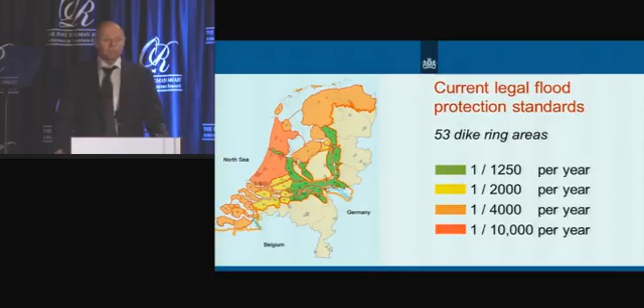Many of the existing standards were partly based on Van Dantzig's pioneering Econometrica article on determination of optimal dike heights, which is considered as the start of operations research in the Netherlands. And we see our contribution as a continuation of that proud history. But some parts of the standards were never substantiated by scientific analysis. Nevertheless, even today, the existing flood protection standards in the Netherlands are the highest in the world, compared, for example, to here, the standard in the USA of 1 to 100 years.

In 1993 and 1995, high flows of the Rhine and the Meuse rivers led to very risky situations. In 1995, the Netherlands had to evacuate more than 250,000 people because of fear the levees would break. Now, this event was a wake-up call to the nation. Moreover, since 1953, the population of the Netherlands had almost doubled and its GDP had increased fivefold. And all these developments and the awareness of the increased sea level rise and climate change strengthened the consensus that the standard had become outdated.

Therefore, in 2006, the Vice Minister of Water Management, Melanie Schultz, who is currently the Minister, asked Deltares to perform a cost-benefit analysis to flood protection. And this was the birth of our project. At the top of our project organization is the Delta program, led by the Delta Commissioner. And at Deltares, we decided to put together the best team possible with experts from research institutes, from government, universities and consultancy firms. These are the CPB, the Netherlands Bureau for Economic Policy Analysis, the consultant HKV, Tilburg University and Delft University of Technology.

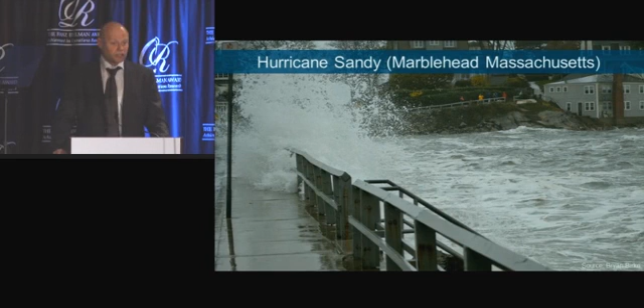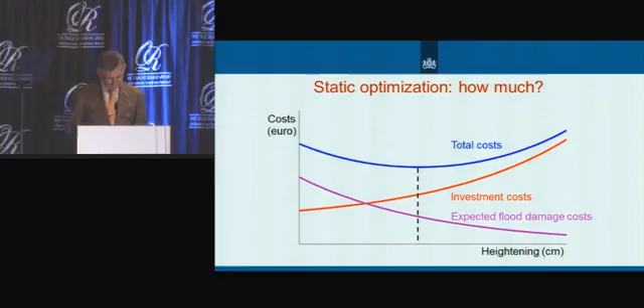The aim of our project is to propose new values for the national flood protection standards based on an optimizing cost-benefit analysis. The image projected here shows the optimization problem in its most simple static form. Clearly, higher dikes mean higher construction and maintenance costs. However, the higher the dikes, the lower the expected flood damage costs.

Absolute protection against flooding is impossible. Regardless how high the dikes may be, there will always remain the potential for flooding. Our approach is to minimize the long-run sum of the investment cost and the expected flood damage costs. Thus formulated, we have an economic question with a rational solution.

However, in the end, a political decision has to be taken because in our calculations many value judgments are made, for instance on the value of human life and the extent of risk aversion. Moreover, there is the equity issue.

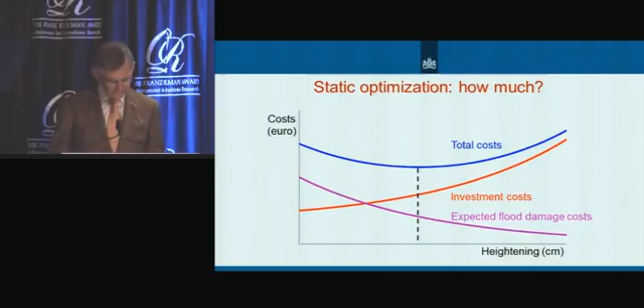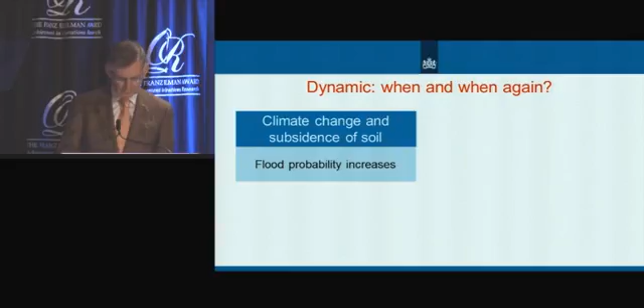However, not only the how much, but also the when to invest question is important because of dynamic effects. The probability of flooding is rising due to climate change and soil subsidence, and both population and wealth are increasing, hence the damage by flooding increases. In combination, expected damage is increasing, that is, the probability times the magnitude of the damage by flooding.

We spent several years and millions of euros to collect huge sets of data to construct and estimate the following important model elements for each of the segments of the dike rings: a cost function for subsequent dike upgrades, a formula for the flood probabilities as a function of dike height, now and in the future, and a formula for the damage costs, now and in the future.

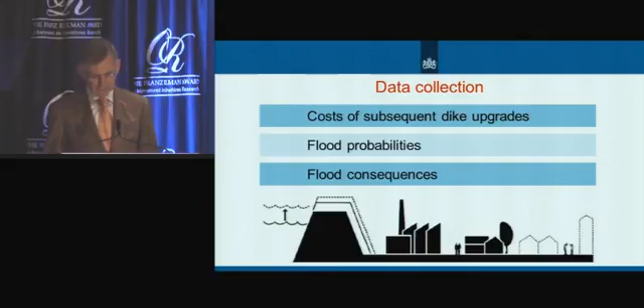In the paper submitted to the judges, we illustrated the detail in which the information has been gathered using the example of investment costs. We showed the extent of knowledge used by the example of the flood probability along the coast. Of course, we are aware of the difficulty of determining the small flood probabilities used in the Netherlands.

Flood probabilities are the combination of many factors relating to the loads on the dike and to the strengths of the dike. The best approximation of the flood probability based on the results of all detailed studies is the specification shown on the image. The flood probability depends exponentially on the relative height of the dike.

The estimates of the parameters are the combined results of sophisticated statistical analysis, physical models for the strengths of a dike, historical data about past events going as far back as the year 800, and nowadays many thousand simulations of many types of very bad weather conditions. For more detailed explanations, I refer you to the extensive technical literature on these subjects, which we had to master for our project and which is detailed in our paper.

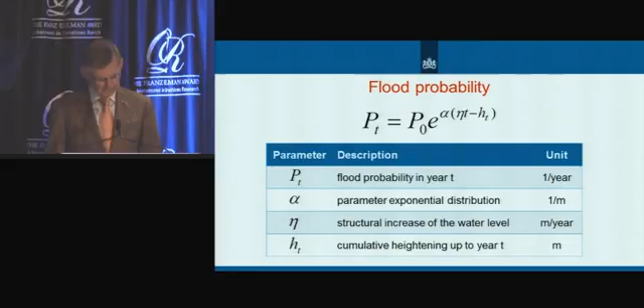Now I'd like to explain a bit more about how we estimated damage costs. To get a good idea of the extent and impact of a flooding incident, the 35 water boards and provinces constructed more than 700 flood simulations using regional hydraulic models. In a moment, we will show one of the larger of these flood simulations.

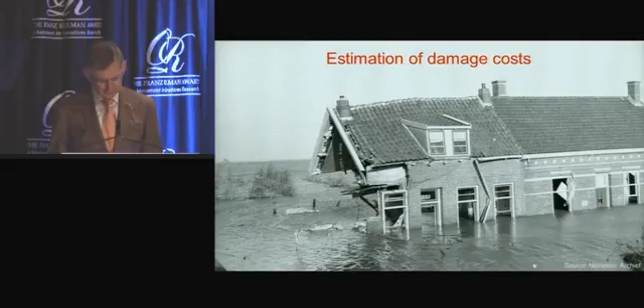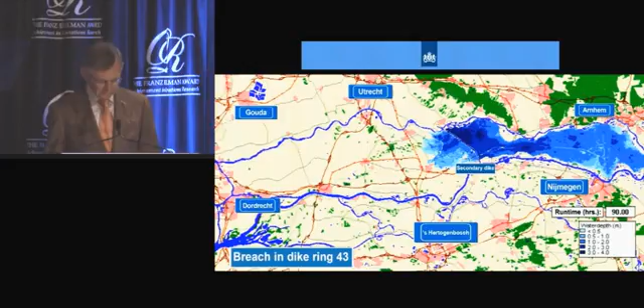The animation starts at the moment a breach occurs in dike ring 43, a dike ring with a population of 300,000 people. In this animation, the breach is located at the east side, which is far away from the sea, so the whole dike ring 43 is flooded. The flood stops only temporarily when it hits a secondary dike. It seems to halt when reaching the primary dike that separates dike ring 43 from dike ring 16.

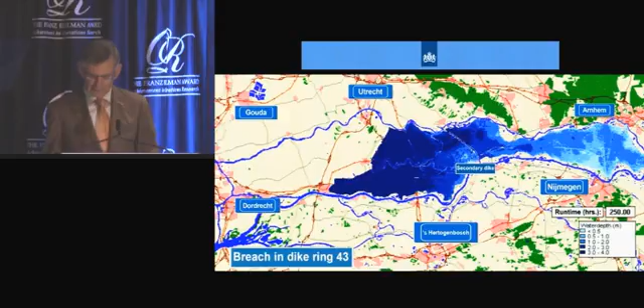However, in this simulation, the flood is so big that it overtops even this primary dike, so that dike ring 16 is flooded as well. As you can see, the water will reach a depth of around 4 meters in the western part of dike ring 43, which means that the material loss in that area is high and almost complete. The total damage in these two dike rings will be 75 billion euro.

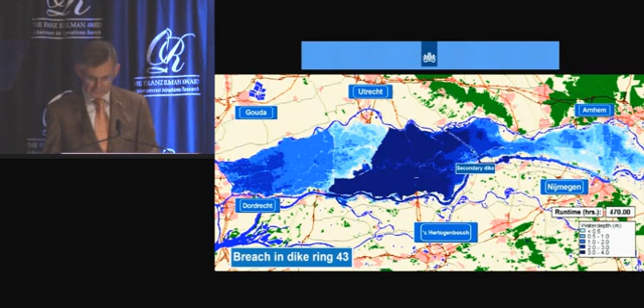For each of these 700 flood simulations, we combined local information about speed of the water, inundation time, and water depth, together with detailed geographical information systems featuring data on number of persons and households, on real estate objects, infrastructure, and so on. Multiplying the damage costs in each flood simulation with the probability of that flood occurring, and then summing over all flood simulations gives an average value for the expected damage in each of the 53 dike ring areas.

My colleague, Dick den Hertog, professor in operations research at Tilburg University, explains how we approach the optimization question mathematically.

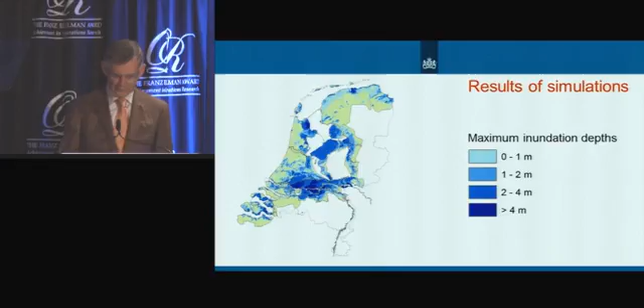The optimization problem is to minimize the total long-run costs, consisting of expected damage costs and investment costs for upgrading dikes. Most of the dike rings contain multiple dike segments.

This is a picture of the Bommelerwaard. The dike ring consists of 3 segments, since it is surrounded by 3 different rivers with different characteristics and thus different parameter values. Segment 1 is the northern dike along the river Waal. Segment 2 is the southern dike along the river Meuse. And segment 3 is the western dike along the river that connects those 2 rivers.

I live here with my family. In 1995, we were also evacuated. Fortunately, nobody was hurt, even though the water reached all the way to the very crest of the dike.

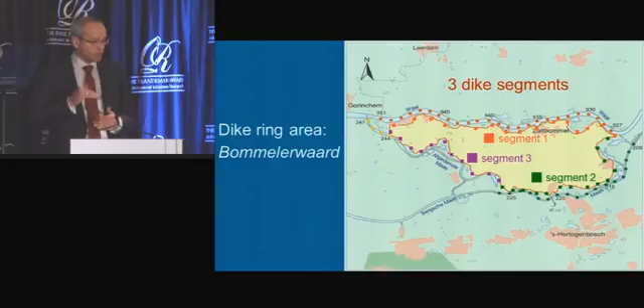Dynamic programming can be used for dike ring areas up to 3 segments. But in the case of more segments, the state space is too big. We also tried an impulse control approach, but it appeared that this method cannot efficiently solve problems with multiple segments. We therefore developed a mixed integer nonlinear programming model. We don't have time to discuss this model in detail. We only illustrate the structure.

We discretized the time, and the binary variables are the decisions whether a dike is upgraded at a certain time or not. Note that we need a binary variable because of the fixed investment costs for upgrading a dike. The continuous variables are the amounts of heightening of each segment of the dike.

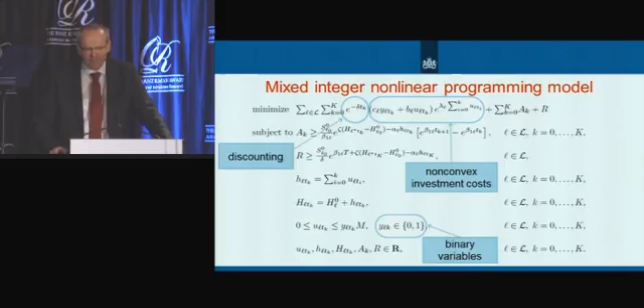Both the expected damage and investment costs are nonlinear functions. The investment cost is a function of the cumulative dike heights, since heightening a dike also means broadening the dike. So upgrading a high dike is more expensive than upgrading a low dike. This investment cost function leads to a non-convex objective function. However, we have much evidence, both from theoretical and numerical convexity analysis, that the resulting optimization problem is convex in a wide neighborhood of the optimal solution. Note that we also discount the investment and damage costs.

The biggest problem has 10 segments at a time horizon of 300 years, with a discretization period of 5 years. A time horizon of 300 years is necessary to get a stable solution for the period until 2050, which is the relevant period for policy. The corresponding optimization problem has 610 binary variables, almost 1900 continuous variables, and in total more than 3,000 constraints.

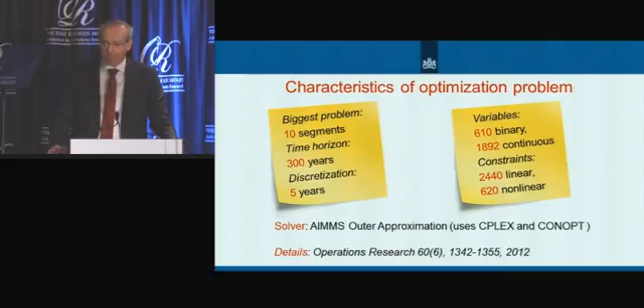We used the outer approximation method that is implemented in AIMMS, which uses CPLEX and CONOPT as solvers for the linear and nonlinear problems. Due to recent developments in mixed integer nonlinear programming, we could solve problems up to 6 segments. Using additional heuristics developed by our team, we were able to also solve the largest problem with 10 segments within 1 hour. Solving all 53 dike ring areas took about 1 day. For more details on the model and solution methods, we refer to our paper in Operations Research. The model and solver were implemented in a user-friendly software package.

Let's have a look at the optimal solution for a dike with 3 segments. In this figure, we have the years on the horizontal axis and the flood probability on the vertical axis. The flood probabilities of all 3 segments are the 3 sawtooth curves in green, yellow, and red. The first upgrade is in 2034. Note that all segments are upgraded at the same time. This is plausible since upgrading a segment when another segment is still the weakest does not improve the safety very much. Of course, the amounts of heightening for the three segments may differ.

Immediately after an upgrade, the probability decreases sharply. Thereafter, it increases again due to rise in the water level. And then, in 2075, all three dike segments are upgraded again, and so on. Finally, we defined the economically efficient standard as a central value for the probabilities associated with the optimal investment strategy. This is the blue curve in the picture.

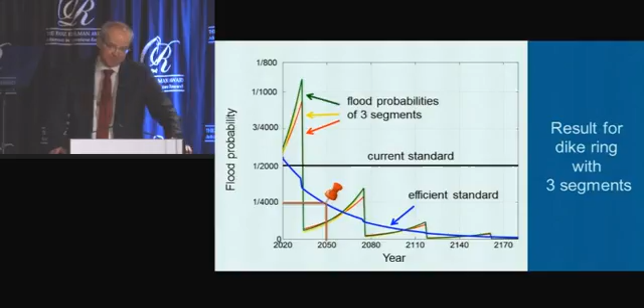The most important results of our project are the efficient flood protection standards. Here you see the efficient standards according to our model on the left map and the existing standards on the right map. The existing standards are highest in the central western part, the red color, and lowest along the rivers, the green. The other areas, yellow and orange, are in between. If we compare the two maps, we observe the following.

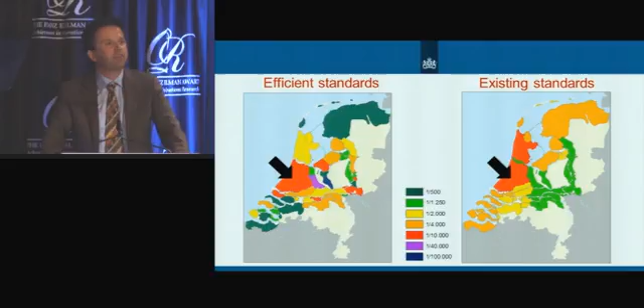1. Flood protection in the northern part is more than sufficient. Existing standards exceed efficient standards. 2. Flood protection for the most valuable part of the country, the central and western part, is still appropriate. The existing standard equals the efficient standard. 3. The existing standards along the rivers are much lower than the efficient standards. Flood protection should be increased.

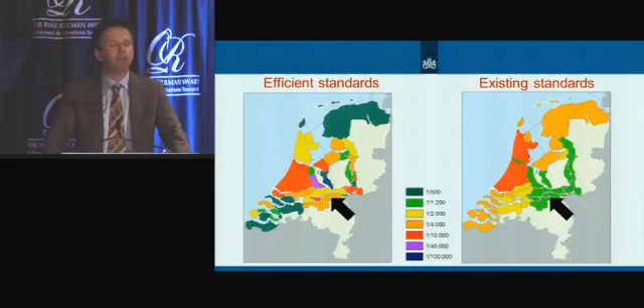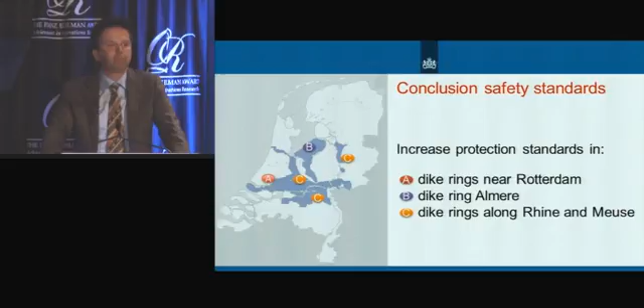So if we compare the standards in more detail, we conclude that flood protection should be improved in the areas near Rotterdam, for the fast-growing city of Almere, and for most areas along the Rhine and Meuse rivers. For the other parts of the Netherlands, the existing flood protection is more than sufficient. So how can we best explain those remarkable differences between the existing and efficient standards?

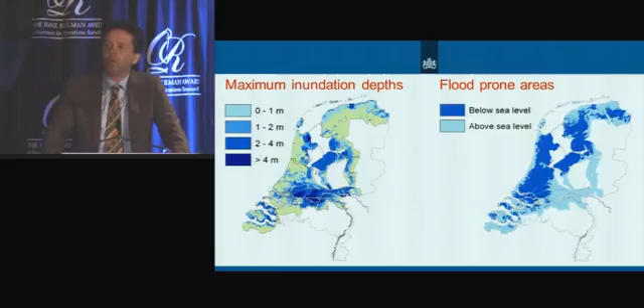Let us look at the total investment cost and damage cost of the different proposals for new standards over the period until 2050. This is the period for which the new standards will apply. For no change policy, no additional investments are required. The expected flood damages will amount to 15 billion euro, and these are also the total cost.

For the advice of the second Delta Committee, an investment of 11.5 billion euro is required. Compared to the no change alternative, the damage cost will decrease with 90% to 1.5 billion euro. Hence, the total costs are 13 billion euro. If our advice would be followed, the investment costs are 3.7 billion euro, and the expected damage cost would be 5 billion euro. The total costs are 8.7 billion euro.

So clearly our advice leads to the lowest total cost and hence is the most efficient. We get 2/3 of the benefits of the advice of the second Delta Committee for 1/3 of the costs. Note that the damage cost also includes the cost of human life and other aspects which are difficult to value in monetary terms. We therefore extensively performed sensitivity analysis. Those show that our conclusions are robust.

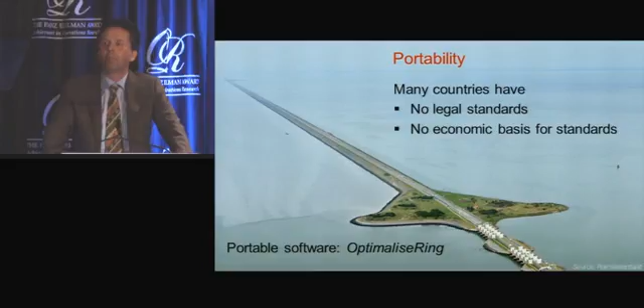It can prevent unnecessary human loss and save billions of euros in flood damage. The omission of cost-benefit analysis in flood risk management may turn out to be penny-wise but pound-foolish. The optimization model and solvers are implemented in a user-friendly software package to enhance portability. Authorities in France, China, Pakistan, and the US have contacted us to discuss the methodology.

Our project was innovative in flood risk management and operations research. The project was complex, involving more than 5 different disciplines. It ran from 2006 until 2011, 6 years in total. And the budget for research and data collection was over 4 million euros. Dozens of persons were directly or indirectly involved, from different organizations like ministries, provinces, all water boards, several universities, research institutes, consultancy firms, etc.

And thanks to the time and budget we had, we were able to get into the details of a wide variety of flood risk situations. And this distinguishes our advice from the second Delta Committee, which was based on a more global analysis in a relatively short time span. So the quality of our project is widely recognized.

Since 2006, our project and recommendation survived already 4 different governments. And these governments had coalitions from very different political parties. And in each government, a member of the cabinet took explicitly responsibility for our project and for the results.

So at this time, the government minister who is responsible for our project is Minister Melanie Schultz. She is the highest in rank at the Dutch Ministry of Infrastructure and the Environment, and member of the cabinet. And so we are extremely proud that she has recorded a special video for the jury and public of the Franz Edelman Award. With her words, we finish our presentation.